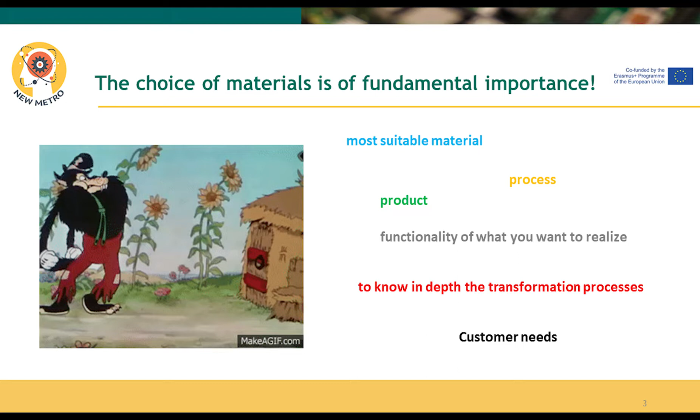In the automotive industry, plastic has a fundamental value. Plastic materials are in fact used for most car components. For example, inside the passenger compartment, plastic is used for doors, handles, seats, dashboard. On the outside, for bumpers, grills, spoilers, with both a structural and aesthetic function.

The choice of plastic in the automotive industry is linked to its characteristics. The main advantage is due to its lightness. A lighter car equals lower fuel consumption, but this without sacrificing performance, safety and comfort.

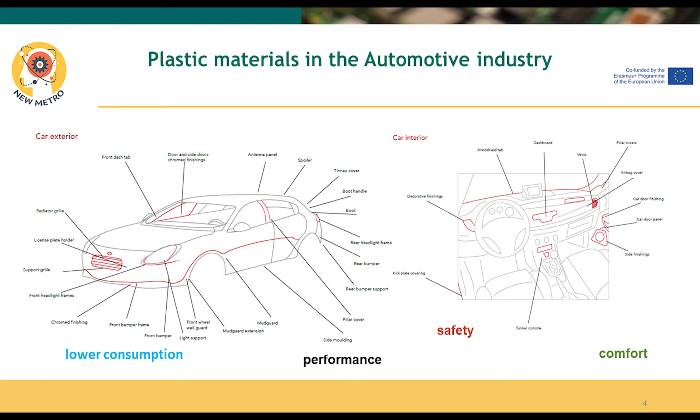To guide the choice, it is necessary to know materials, so we try to deepen this world of plastics which, since the last century, has had a very rapid and continuously growing development. What are plastics? They are all those organic substances obtained through chemical reactions of natural or synthetic products deriving from the chemical refining of coal, oil and natural gas. They are organic materials with a high molecular weight, made up of molecules with a very long chain. For this reason they are called polymers.

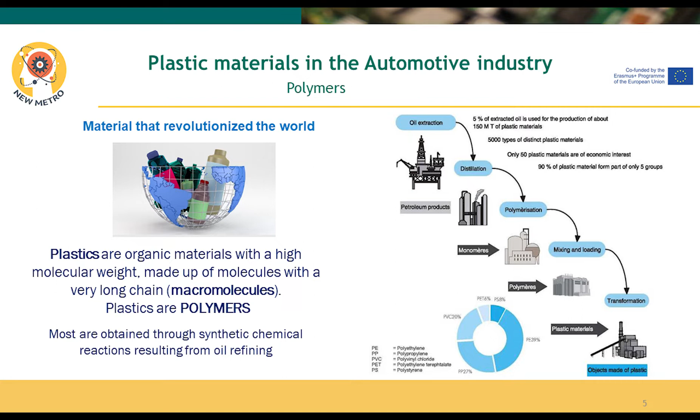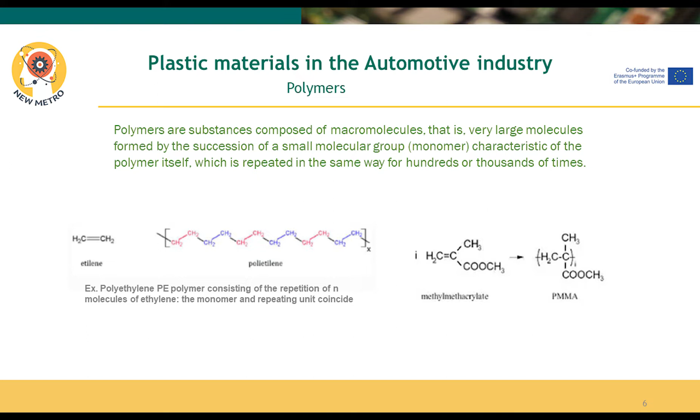Polymers are substances made up of very large molecules called macromolecules, consisting of repetitive subunits, monomers characteristic of the polymer itself, which are repeated in the same way hundreds or thousands of times. The type of monomers that constitute it and the bonds between them give the polymer specific and different characteristics. The plastic tree is a very suggestive representation of the multiplicity of existing plastic materials. The characteristics of the polymer suggest its use, but only its use defines its intended use.

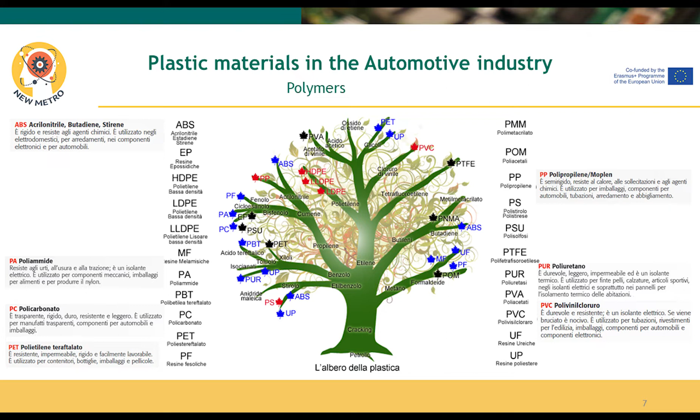A macro aggregation of the polymers and therefore a classification can be made on the basis of their natural or synthetic origin, on the basis of the structure, of the thermal behavior, or even on the basis of the mechanisms by which the macromolecules are formed. Each of these aggregations serves to create homogeneous groups of materials with similar characteristics and therefore guide us in the choice.

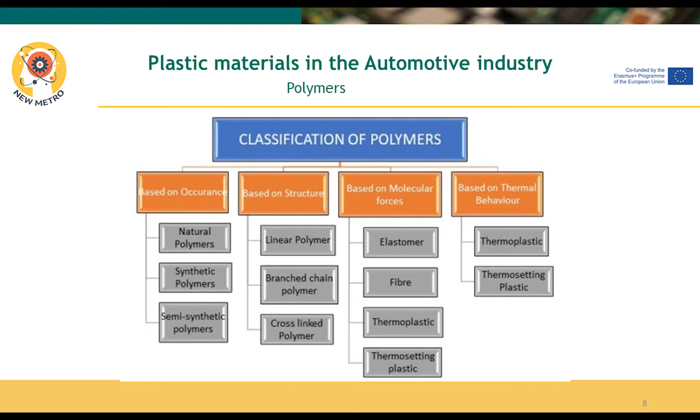Let's take for example two groups of plastic materials used in the automotive industry, thermoplastics and thermosetting. The terms are explicit enough. Thermoplastics are plastic materials that soften under the action of heat, then return to being rigid by cooling, and the process can be repeated several times.

Thermosetting plastics, on the other hand, are plastics which, after an initial softening phase due to heating, harden because of the three-dimensional cross-linking effect. If these materials are heated after hardening, they no longer soften. Now, comparing the two groups of materials, we understand how the structure influences both the characteristics and consequently the use and the transformation processes.

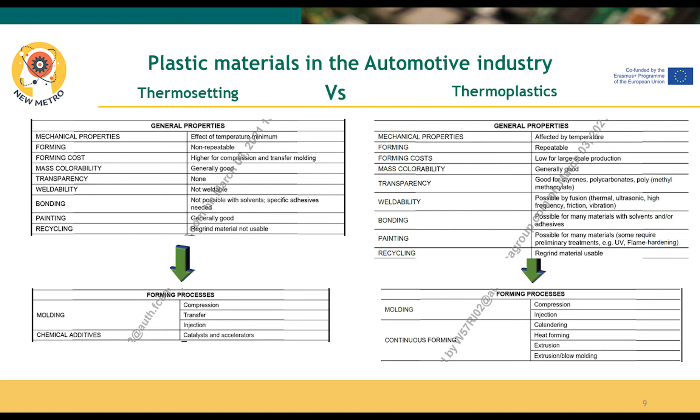The multiplicity of existing plastic materials has given rise to the need to harmonize the nomenclature, also to allow the recognition of the materials of which the products are made in order to facilitate their selection and collection for subsequent recycling. For example, a nylon and glass fiber product will be identified and marked with the symbol PA66GF30 to indicate polyamide plastic, the type of monomer 66, the type of reinforcement GF. GF stands for glass fiber and its percentage in this case is 30.

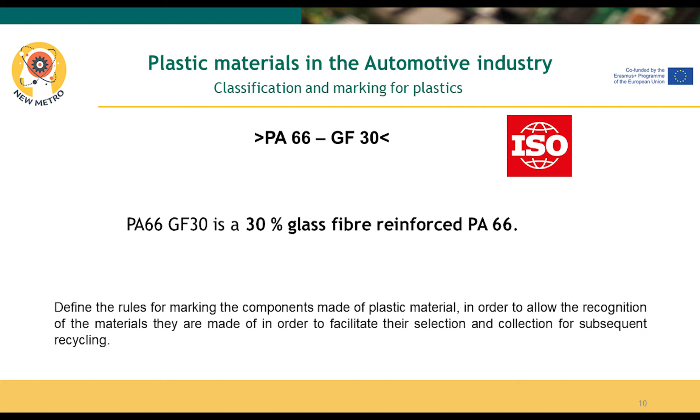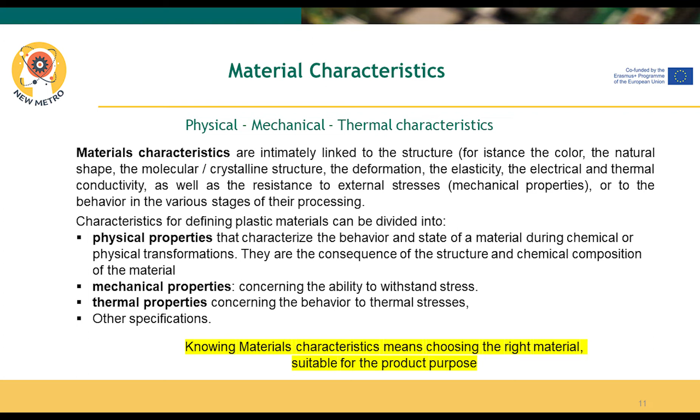So, we understood how the characteristics of the material are the discriminating factor for choosing both use and the production process. So what are the characteristics that we need to know? The main characteristics of a polymer can be essentially divided into physical properties related to the behavior of the material in its transformations, mechanical properties, that is, the ability to resist stress, and thermal properties, for instance heat behavior.

All information regarding the characteristics of a plastic material is given on the technical data sheet. In addition to the main features, there are indications on the process to be used, on the storage and handling conditions. This is an example of a technical data sheet of a glass fiber reinforced polypropylene. For each characteristic there are nominal values, measurement units and test standards.

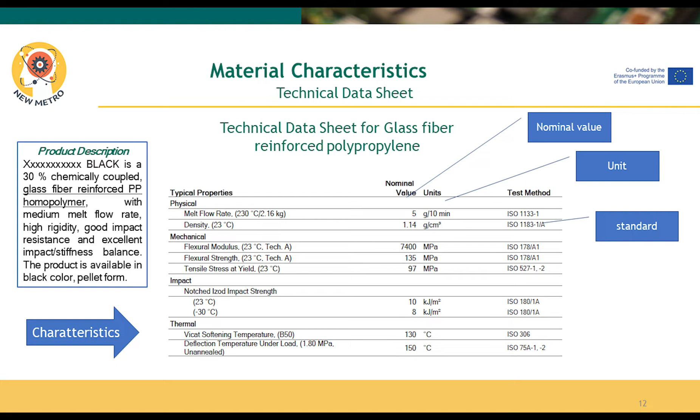Let's not forget safety, as the motto says, safety first. Together with a technical data sheet, the safety data sheet of the product must always be present. A safety data sheet has a lot of information, but what we need to see are the danger symbols. In this case, for paint there is a risk of flammability and irritation.

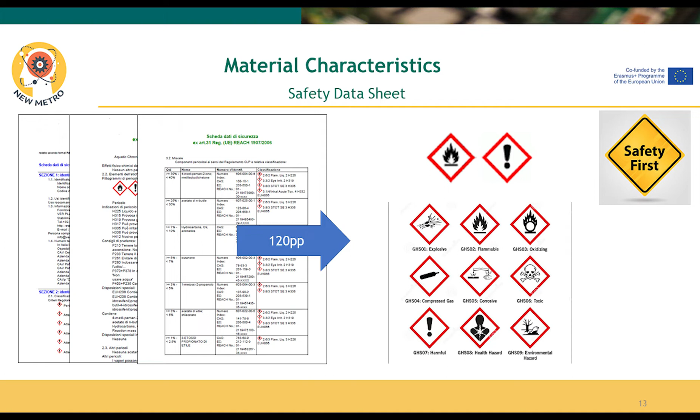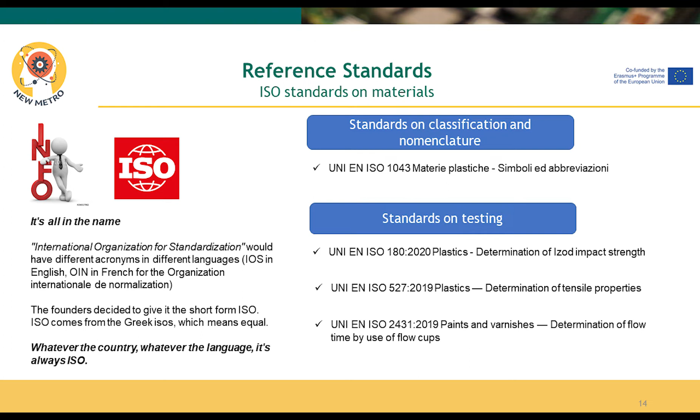Harmonization and standardization involve not only the nomenclature but also test methods to characterize the various materials. Who manages this job is ISO, an independent, non-governmental international organization. Through its members, it brings together experts to share knowledge and develop international standards. A curiosity: the name ISO comes from the Greek isos and means equal. Whatever the country, whatever the language, it's always ISO.

Other reference standards are issued by customers. In the automotive sector, standards are defined for materials to be used with their relative characteristics. The example specifies the physical and mechanical characteristics of a PP and the references of the standards to be used by both ISO and the customer.